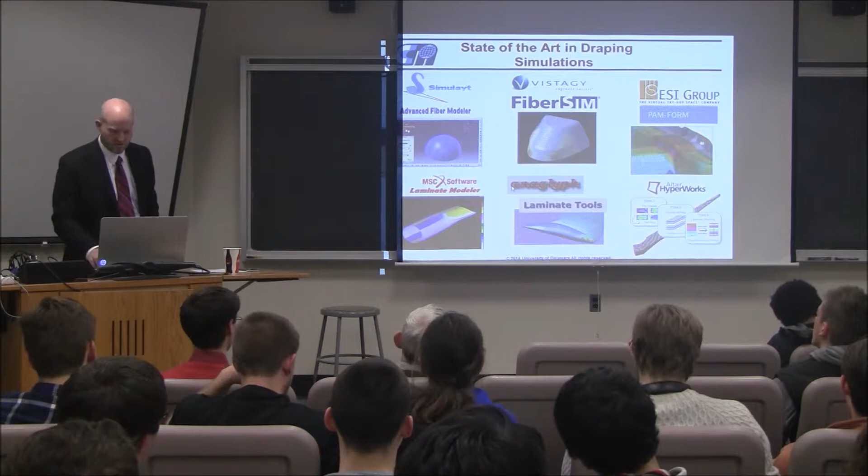And then there's other tools as well. Laminate Modeler does essentially the same thing. You've got Anaglyph laminate tools, and you also have now recently Altair's HyperWorks. This software as well allows you to do draping simulations inside HyperMesh. So these are some of the tools in terms of simulating the manufacturing process for composites.

Now, one of the tools that we use a lot is CATIA. And the reason we do, there's many reasons. One of which is an integrated CAD. It's got integrated composite design capability. It has a lot of embedded capability to ensure you've got compliance with design principles that you have. And as I said before, because you've got this really nice unified environment, it really helps you concentrate on the design and not the tool.

In the past, as I said before, you were sending parts from one environment to another environment. It's very cumbersome, but now CATIA is a tool set that keeps you in that one environment and working very well. The software can also handle assemblies, so you can have composite parts and metal parts in the same design. You can connect them up, you can load them, see how they behave, it's all in there.

The other thing is you can create plies that you can manufacture. You can actually send these plies to machines, to ply cutters, and really make those parts, which is very, very nice. Producibility, which is also known as draping, as I mentioned before, allows you to check that you can really drape this material, and it'll make sure that that can happen.

You can visualize the way the fibers go. You can see if there's any manufacturing problems, as I said, such as wrinkles and bridges, which is basically the folding of the fabric, in a virtual environment. So these are the reasons we use this software, and it's a very, very powerful tool for doing design.

And just to give you an idea of the integration, most of the CAD software you have out there now is based on a tree. It's a nice hierarchical way for you to manage the information. And so they're all pretty much standard in terms of trees. But this is what a CATIA tree looks like. So on the right here you'd have your part, and this is the tree. And in here you would have your composite definition. So you might have some plies in here laid out on the surface.

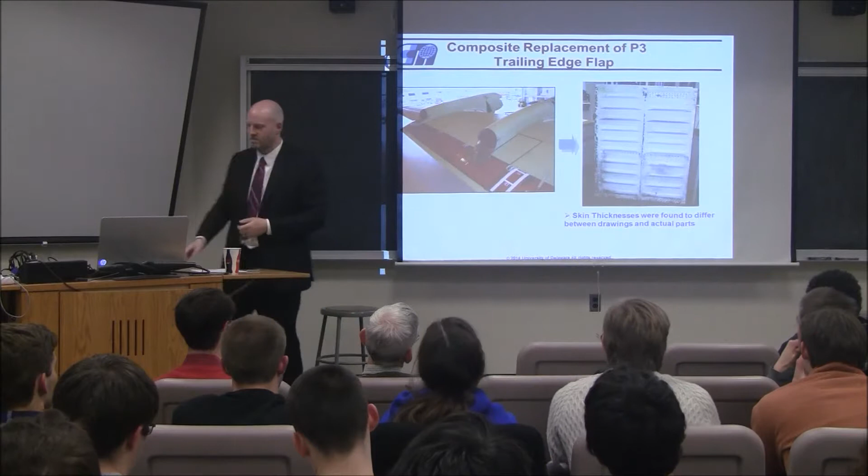But the problem is, you have all these bumps. When you're laying down the material, how do you know you can lay it down without having wrinkles and problems like that? So now with these tools available to us, we're able to virtually see what happens. So what we did was say, okay, let's just start off with one hat. Don't worry about the overall global problem. Make it simple: if we can't lay down one hat, we certainly won't be able to lay down 20.

So what we do is we use the software to figure out, okay, here's the original surface of that stiffener, right? That's reverse engineered. And we say we want to drape it. So we lay down this fabric, and we start from the center, and basically virtually lay it down. It conforms to the surface. And what happens is it seems to be doing okay here, but then it gets to the ends and it starts to wrinkle, right? So these yellow and red areas are telling us virtually you're going to have trouble.

And we know that. We actually get a single hat stiffener. We saw that. But we have the capability to simulate it as well. This is for a 0/90 laminate, you know, a simple plain weave. And if you rotate it 45 degrees, you're laying down now a plus minus 45, and you see it behaves a lot differently. You still have the same problems at the end here. You see these red and yellow areas.

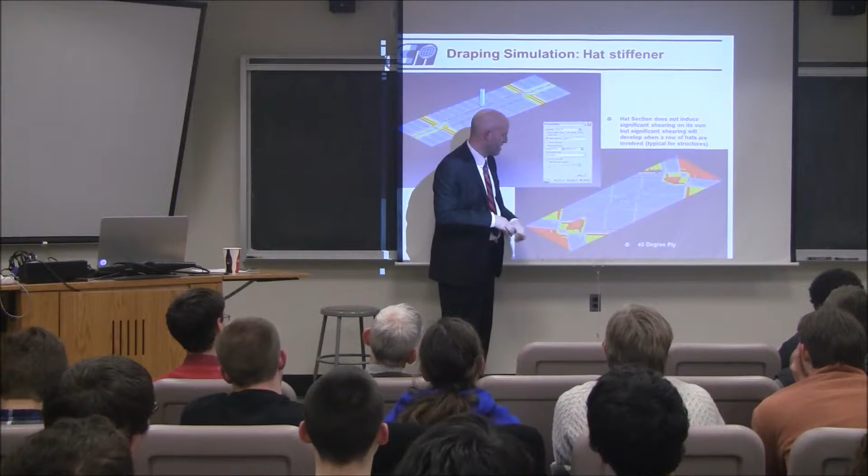And what they correspond to is a deviation of the ply angle. So what you're having here is you've got no shearing. It's laying down nicely, but what happens here is the material starts to shear. And if it can't shear enough, it starts to wrinkle, right? Just like nearly all fabrics do. So what these colors here are, the yellow is 5 degrees and the red is 10, telling you that it's wrinkling 10 degrees beyond the original angle, 45 degrees that it was laid down. So here it might be trying to lay down 55.

Now the simulation is going to try and lay it down no matter what. In real life, wrinkles happen, okay? It doesn't actually show you wrinkles here, but it's showing you that it's going to want to shear and it's going to want to wrinkle. And so what you're doing here in a virtual environment is you're assessing the feasibility of making this. So what you can do is you can say, okay, let's change its shape. So we'll make it nice and smooth, right? We'll kind of straighten out the ends here.

Now in doing so, you're going to change its characteristics, right? It's got a certain bending stiffness requirement. So inside this environment, we can modify its shape, load it again in bending, and maybe tweak the height, maybe tweak its profile, and do that a number of times until you get the same bending stiffness, but now you know you can make it out of this fabric.

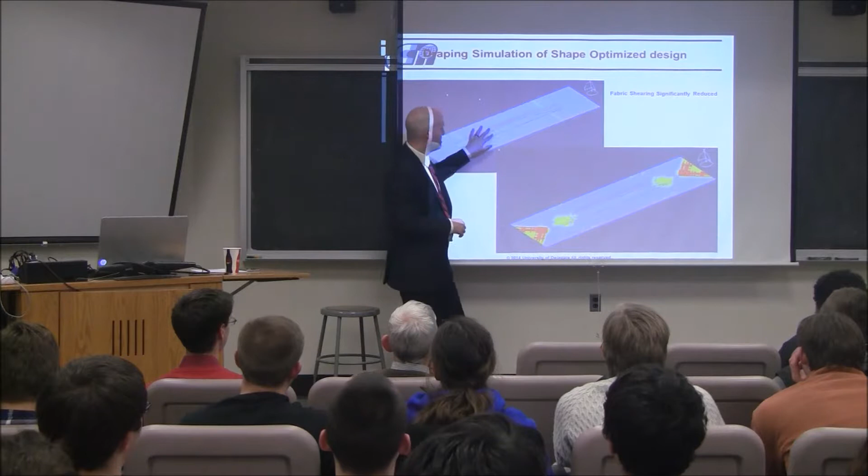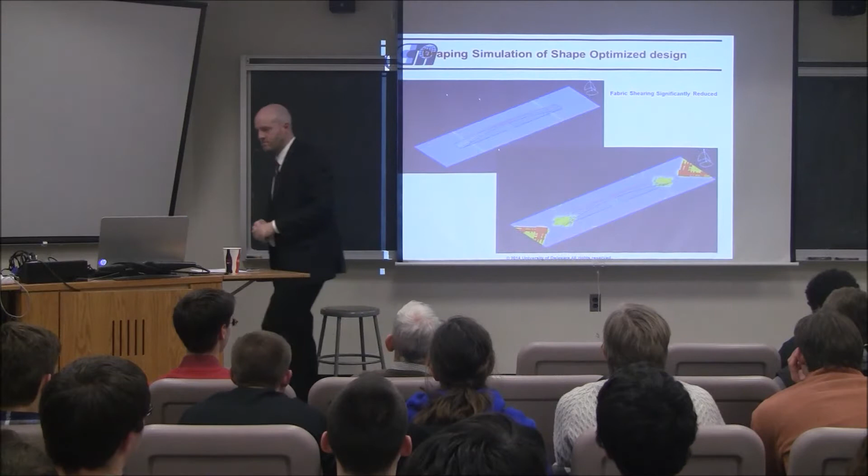And what you see here is we modified this shape. It's slightly higher in the center, slightly broader in the center as well. And you can see here, this is the 0/90 fabric, no problems. The plus minus 45, we do start to see a little bit of problem area outside of here, but the overall hat itself is fine. So there's no problem within the hat, which is the area that we're interested in. So then we learn from one hat, you extend it to all the hats, okay?

So here's a simulation of the structure again. And what we do is we start laying the fabric down at the center, and we start flattening it out. That's what the software is doing. It's starting in the middle and virtually laying it out. And you see, once again, you have all these problem areas along the edges of the hats. So these are 3 simulations where I vary that shape progressively. And you can see here, when I go to my end shape, all the yellow and red has gone away.

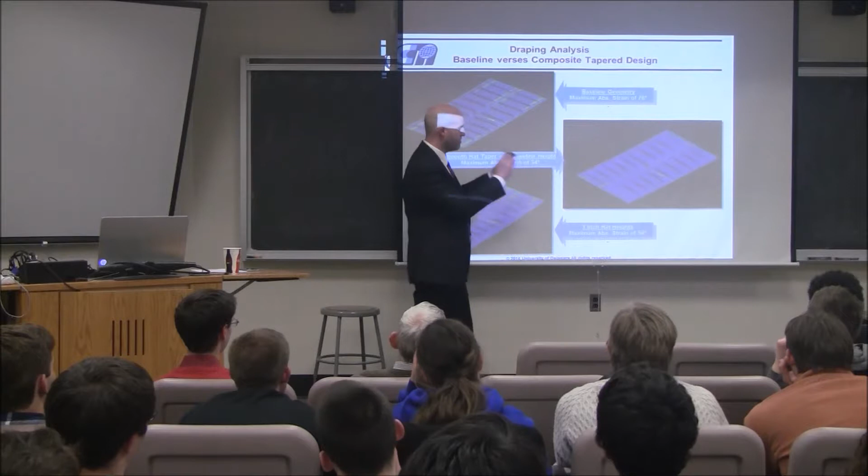So now we can actually get a single sheet of whether it's a 0/90 fabric or a plus minus 45, you can lay it right on there and have confidence that it won't wrinkle. And we did, and it was not a problem. And this is just a simple example of using virtual tools to guide the design process. So that's an overview of the tools that we have available in terms of FE and CAD.

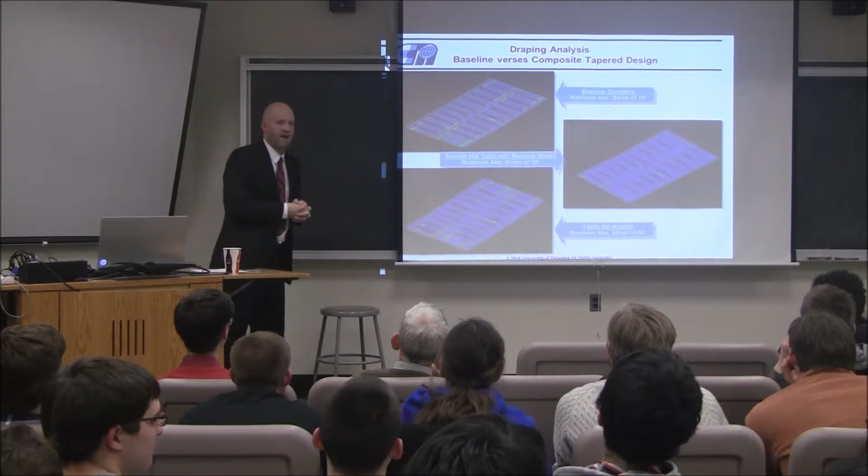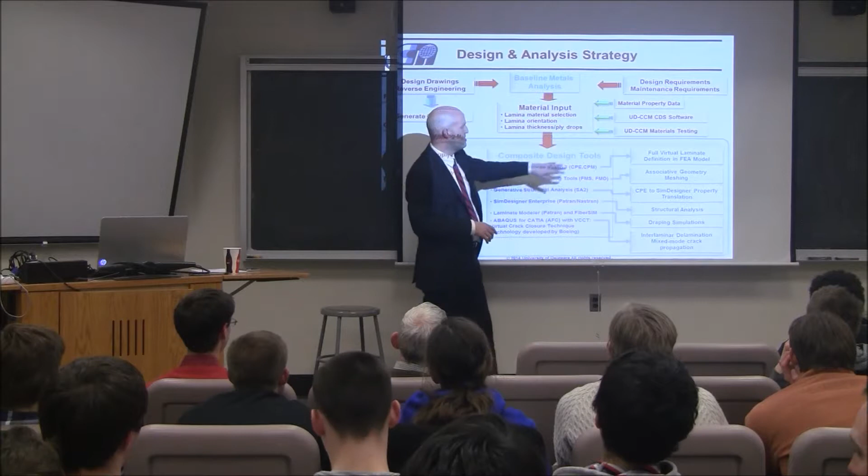And what I wanted to talk about as well is, in the earlier slide I did mention in the strategy, before we even get into the CAD environment, a lot of times we want to know what are the baseline properties. What are the properties of a ply or a layer? And so the nice thing is we have a lot of tools in-house at CCM that we've developed, and one of the ones that I developed was called CDS. What it basically is, it's an advanced scientific calculator for composites.

So it allows us to, say, combine a fiber and a matrix and predict how those two will work together in terms of stiffness and strength. And so these tools were derived from very basic DOS programs in the 80s, and we've now streamlined it, and now it's at version 3, and it's a nice, simple graphical user interface where you can create virtual plies and look at the stiffness and strength of those plies.

You can also create virtual laminates. So think of it as, before you even go off and do a full-blown FE analysis, you can basically get an idea of, well, what sort of materials should I be using for this FE analysis? This gives you kind of a ground zero assessment. You shouldn't always just fly right into a very complex analysis with a very complex design. Start simple. Like the old engineer would start with a simple calculator. Hand calculations can get you 70% of the way without all these iterations in an FE analysis.

So this is a very nice tool from the ground up. And it's not the only one. There's a lot of tools out there for doing this. But we built this tool internally. And it's not just for simple ply or laminate design. There's other tools in here as well. You can actually design cylinders inside this software. You can do other types of analysis as well. Beyond just mechanical, you can do thermal analysis too.

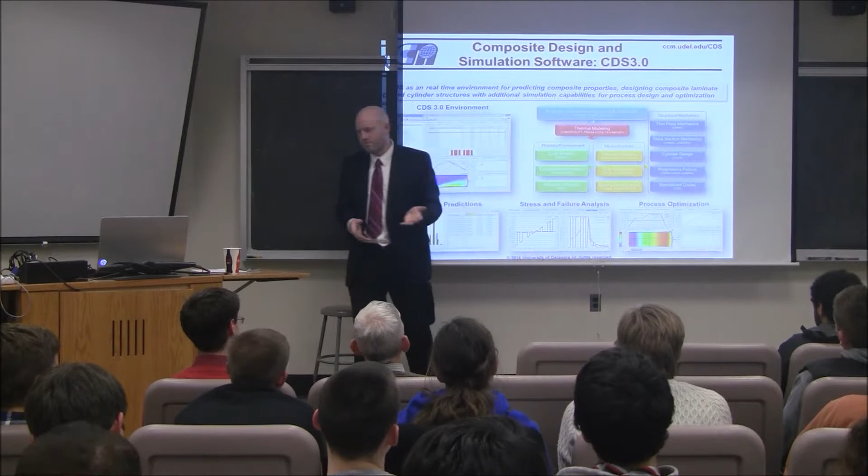And there's other codes in here as well in terms of processing. Cure kinetics is another code, so we can actually predict how materials cure through heating, and we can also predict how they shrink. And we also have other codes in here as well that feed into whatever design we're looking at. So this is an example before you even go into CAD. You can do a lot in determining how a composite will behave using these tools.

So what you can do in the tree here is you can literally just click any material or micromechanics input or laminate, and it will show the input of that analysis here, and it'll show you the results down here. And as I mentioned before, the input here could be a layup. You might say, well, I'm going to make this part or this composite, and based on my metal analysis, I know it's got a certain stress, it's got a certain stiffness requirement. In here, you can virtually design that laminate. Add and drop plies on the fly.

It's a real-time solver, so that you can figure out fairly quickly: I need 16 plies of material at a minimum of, say, carbon, or I might need like 25, 30 plies of glass. But then it starts to get a bit heavy. So you're starting to do simple assessments of what are the candidate materials, the candidate layups that you can actually use to replace this metal structure.

So that's kind of an example of what you can do in there. And there's a lot more you can do as well. But that's what we use it for across the street. So this software, it's been out now for over, I'd say, 7-8 years in this form. And it's a nice tool for going from mechanical property inputs to a virtual result of stiffness and strength.

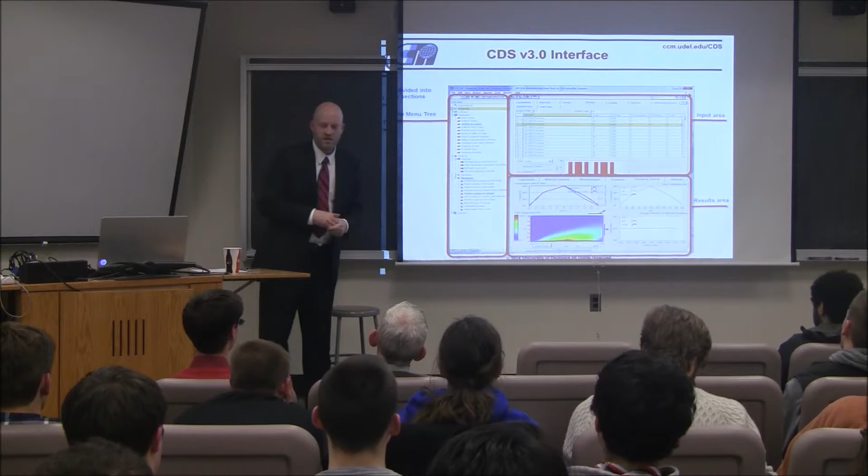And so that's all good and well as a scientific calculator in that regime. But what we want to do is think beyond that. There's a lot more data associated with the composite beyond just its stiffness and its strength. There's information about the source of the material, the lot information, who made it, who tested it, all this information beyond just property inputs. And so what I've been working on is coming up with a new intelligent framework for data management. And what this allows you to do is create an open format for managing all this data.

There's a huge amount of data when it comes to a composite. When you combine a fiber and a matrix, there's a whole wealth of information about the fiber and the matrix, beyond just properties. So what we wanted to do is have this framework where we capture all that information, whether it be the people that manage these materials, whether it be the test labs that test these materials, the models used to predict properties, okay? Storing all this information on the cloud, the process by which this part is made, the materials, as I said, used, the test equipment and how it's reported. So what we wanted to do was create an open method by which all this information is managed.

And what we've done is I've created this software called SMARTree, and it's an open XML format, just like HTML, but it's in XML. It's a very basic language for storing information. And what I've done is created a nice simple client for you to build information. So before I show you the interface, I wanted to explain, so what are these smart trees? An XML tree is essentially, as I said, a very simple way to represent data. So what I wanted to do was build these trees that have some intelligence embedded in them, and also some tagging ability embedded in them. And I'll talk a little bit about both of those.

So, as I said, a smart tree is a simple tree structure comprised of elements. And what the client allows you to do is build this information very quickly with very little input or manual input required to really build libraries of trees. And these trees could be trees of material properties, they can be trees of a process, they can even be trees of people. And you can build these trees and build a process or a part out of these trees. And you can also use it to track production and workflow.

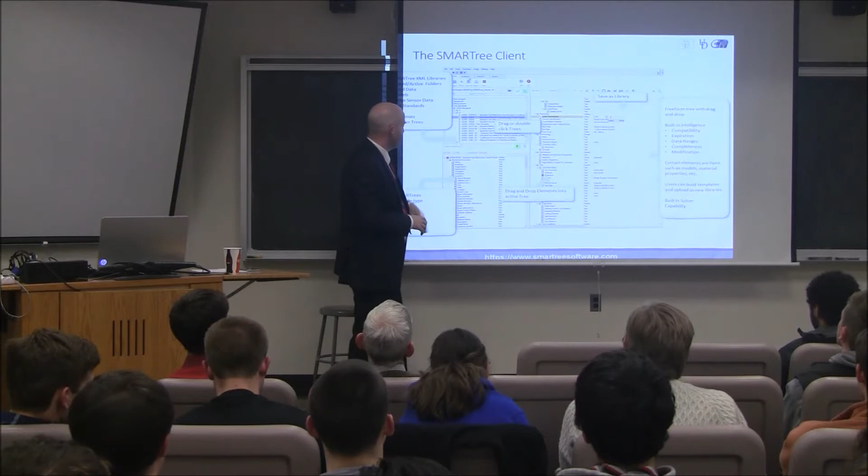And as I said, it's all simple XML. So anybody has access to the format. Most of you may know what XML is. That's what it looks like. This is an example of a smart tree single element. And this is the actual client. So here on the top left we have our libraries, and this is where all the information is stored. Down here we have a preview, and on the right we have a smart tree.

And in the smart tree we've got all these elements. And the elements can be text, dates, a selection, files, images, whatever you want in there. But you can build a tree and have it be a format. As I mentioned before, there's many different types. In here I've got a bunch of different ASTM entries. And so you can actually build a tree, apply logic inside the tree, and then save that to the user community. And now they have available a very simple tree hierarchy.

And as I mentioned before, a tree hierarchy is where all the codes are going, all the CAD codes. It's very easy for you to interrogate the tree. What's important? Who wants what? There are child and parent elements in there. So there's a really nice way to logically build a tree. So that's kind of the idea behind this software.

And these are the elements, as I mentioned before. It's kind of hard to see here, but the elements within a tree that I've built so far are headers, text, dates, selections, material trees, laminate tree.

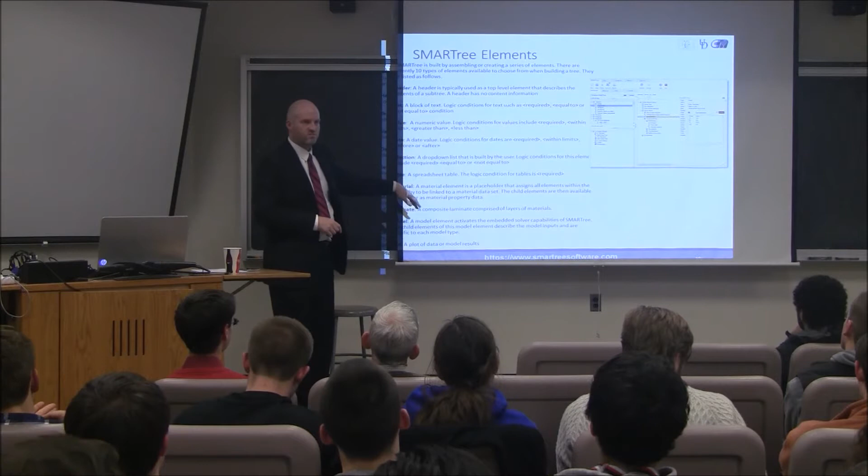There's really a whole host of things I've put in there to get things started, but you can actually build a lot more. And there's a whole lot of logic. Each one of these elements here can have its own logic, whether it's greater than, less than, equal to a value, if there's information missing, if the selection is wrong, things like that. These are conditions of logic.

So that's the idea. One of the other things I mentioned before is what we're trying to do is have a tagging, just like hashtags. So you can actually create a property smart tree, and these would have just properties, which would have values and units. These are the child elements of that. And so using this property hashtag or property tree, it will search all your materials in your smart tree libraries and pick out the properties that are in this property tree.

So for instance here, if I have stiffness in the one direction, it would look in all my libraries that are all smart tags, and then make those properties available for me to have inside a model smart tree. So this model smart tree could be a laminate analysis. So all the properties are immediately available to you as well. Or it could be available to an ASTM smart tree, or a MIL-Handbook smart tree, or even a process smart tree. Whatever information you have in, say, a property tree is fed forward into the end-user trees, which might be models. So this is kind of the direction that we're going with that.

And there's a website that goes in much greater detail, tells you all about it. You can download the software. There's a whole pile of examples, ASTM materials. I've got 50, 60 materials in there, a bunch of standards and things like that. So that's kind of where I'm going with that.

So what I wanted to wrap up with is give you a summary of the CAD. And the other thing is, don't just dive into CAD. Always try and use the simple tools to get you started, especially in composites, and feed it into CAD. And there's a whole host of tools out there available in composites for doing design that I wish I had 20 years ago, but we have them now.